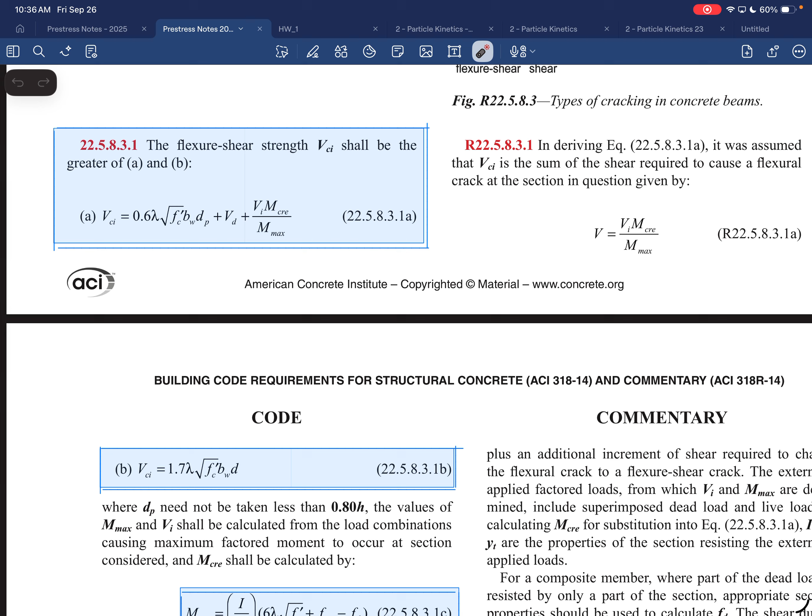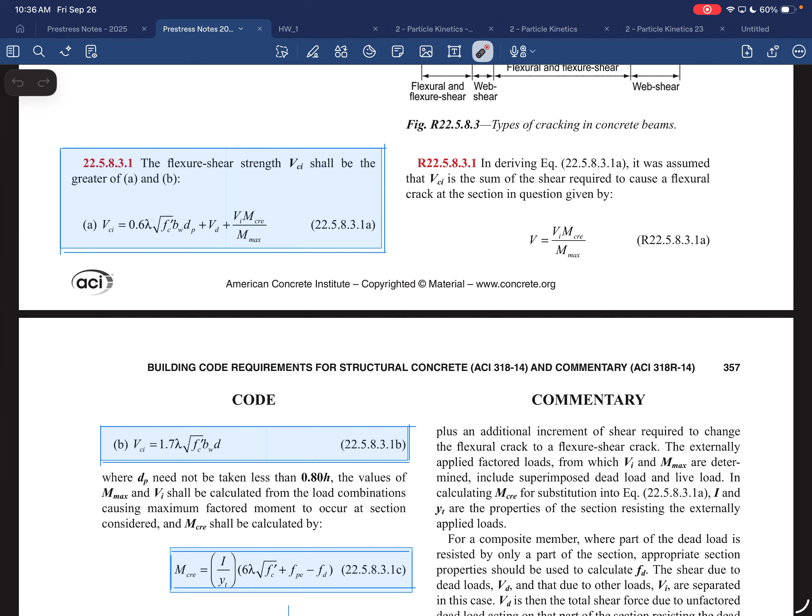It's really funny, is one of my sons. We would do lots of rock, paper, scissors, and my younger son almost always wins. And then he leaned over one time and he goes, 'Watch it, he always does paper at the beginning.' And then he figured it out, he always does paper at the beginning. And it's just... we even told him, and he still does it. It's because then you start playing, well, maybe he's gonna think that I'm gonna do paper, but I'm not gonna do paper, and then it's a mental game.

Tony's got you beat twice now, Will.

Okay, so here's VCI, right? And again, look at these terms in here. There's a lambda, we know what that is. BW, even that isn't going to be super clear because depends on in your homework it's a double T, and then with the web that's tapering, right? So even almost immediately, what do you do for the BW? VI, I don't even know what the hell that is.

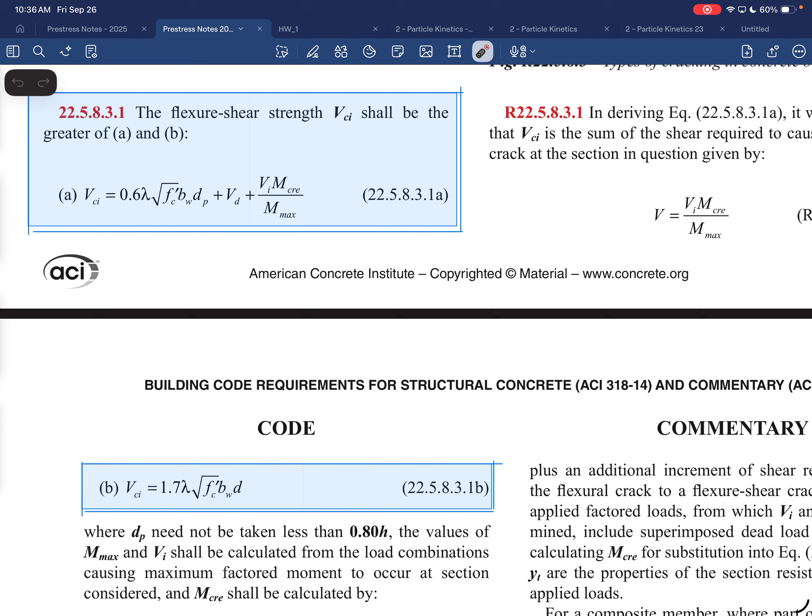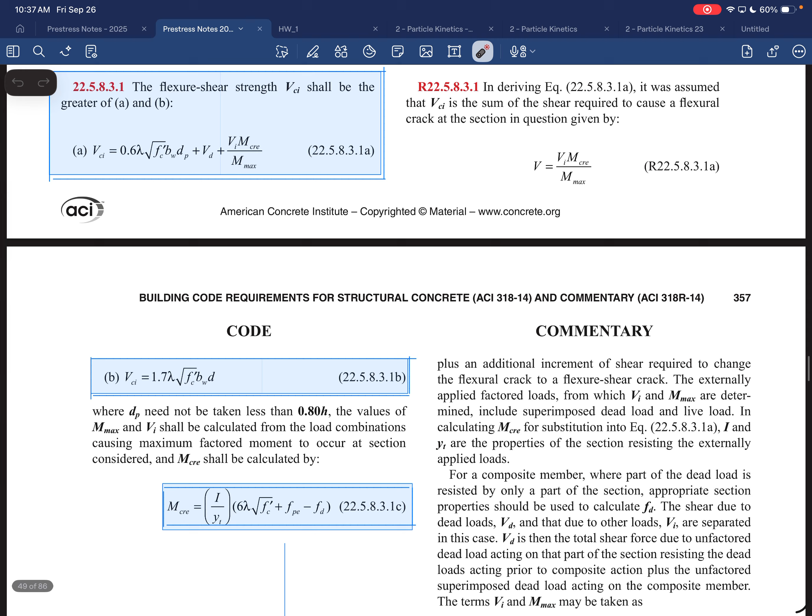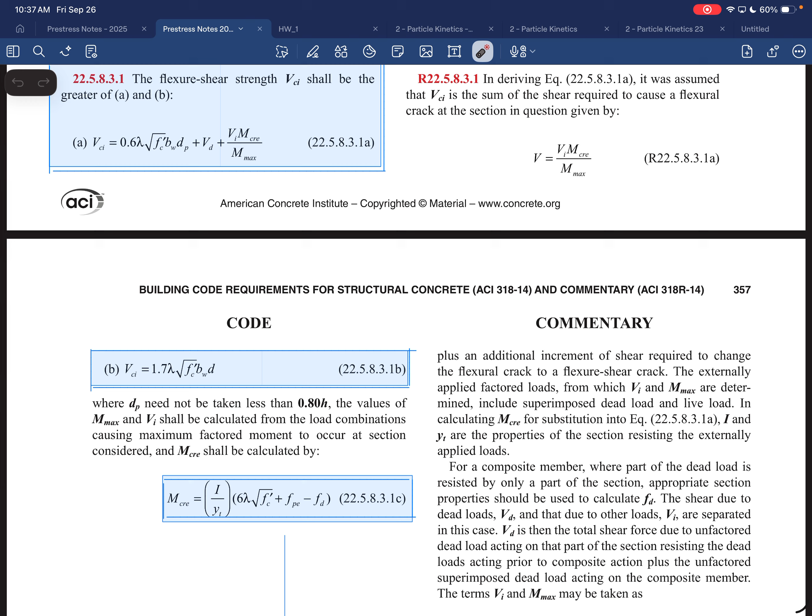Okay, MCRE is an equation. You look up the MCRE equation, there it is right there. Son of a bitch, right? And then, but then there's, again, some simplifications that you might be able to use as you go through here, right? So it's VCI is either this one or this one. So it's the flexure-shear shall be the greater of. So you grab the greater of this one or this one.

So just VCI, you have to put in a max on both of those things, okay? Then you keep going, right? And then this MCRE that shows up in that equation up there, that's what you use as the MCRE equation. Oh, there's a YT right here, right? We got to figure out what that YT is. We got a lambda, we got an FPE, I don't know what that is. An FD, I don't know what that is. That's what you'd be looking up in the nomenclature sections. It'll tell you what each one of those things are, and you have to go and read them and say, what the hell do those mean?

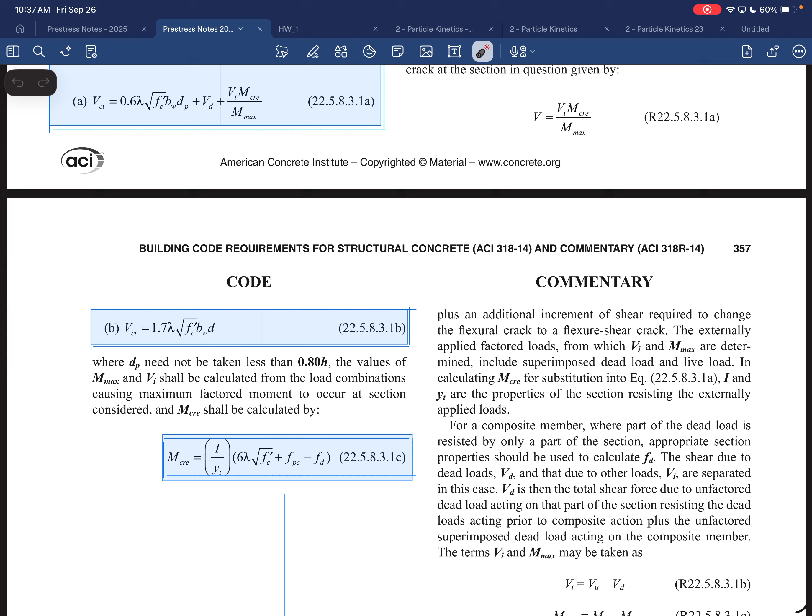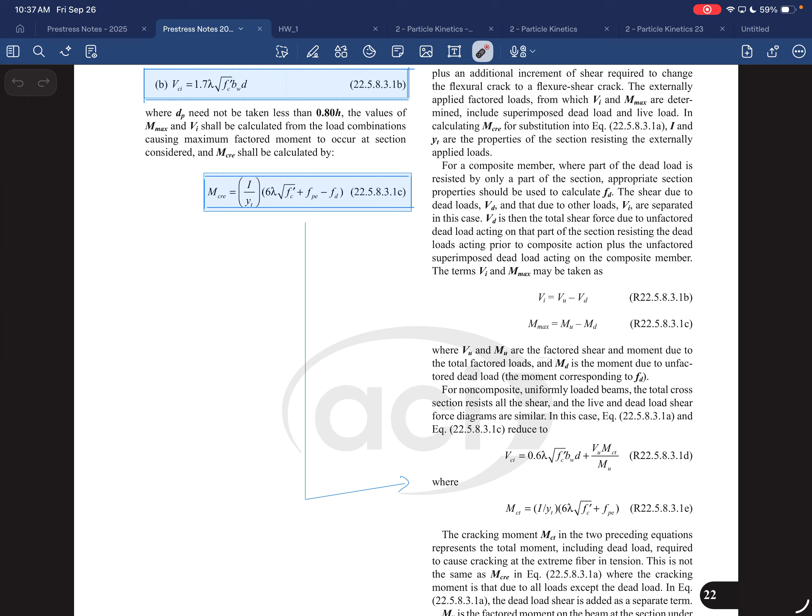That's kind of some of the stuff I'm going to go over today. Okay, and again, some simplifications that you may be able to use. I got this arrow here, you may be able to use that simplification. But you can read the stuff over on the right, and it'll tell you, if you can, use the simplification. I'm pretty sure you could use that one, but maybe just put an arrow to it with a question mark.

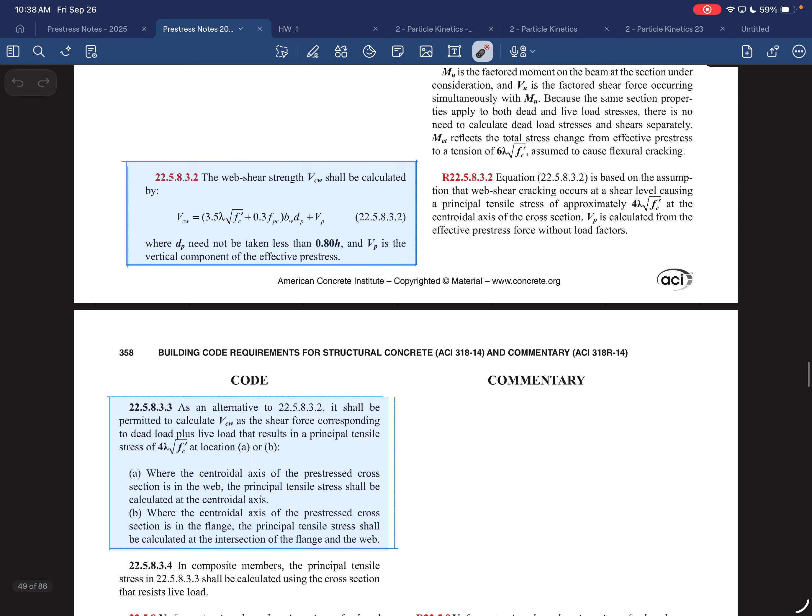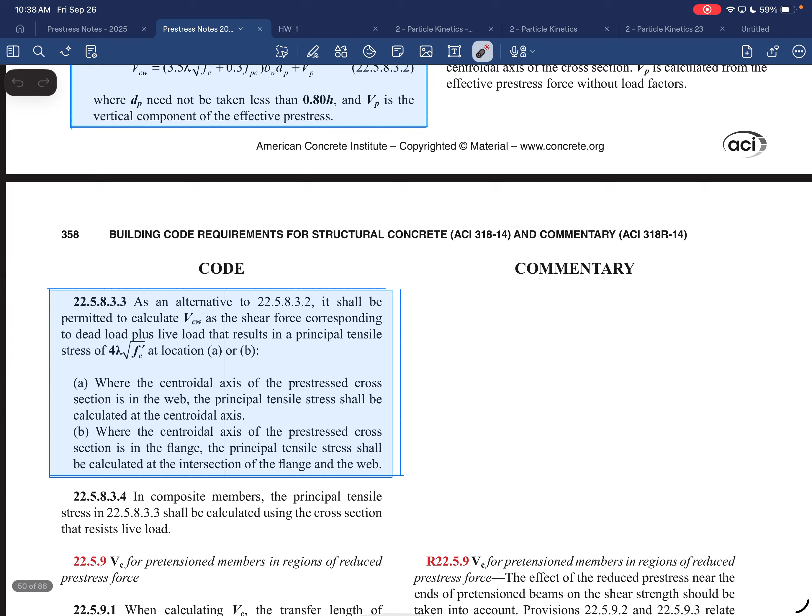This is from last time I taught it. Okay, VCW shall be calculated by this, right? Again, some other variables that are showing up in here, right? What is the VP value? And so it'll tell you all that stuff throughout. As an alternative to it, shall be permitted to calculate VCW as the shear force corresponding to the dead load plus the live load that results in principal stresses of this at locations A or B, right? So hopefully you start seeing this is a bookkeeping, logic, confusing as hell assignment, right? Like I said before, this is probably one of the worst you've seen, once you dive into it, you'll see.

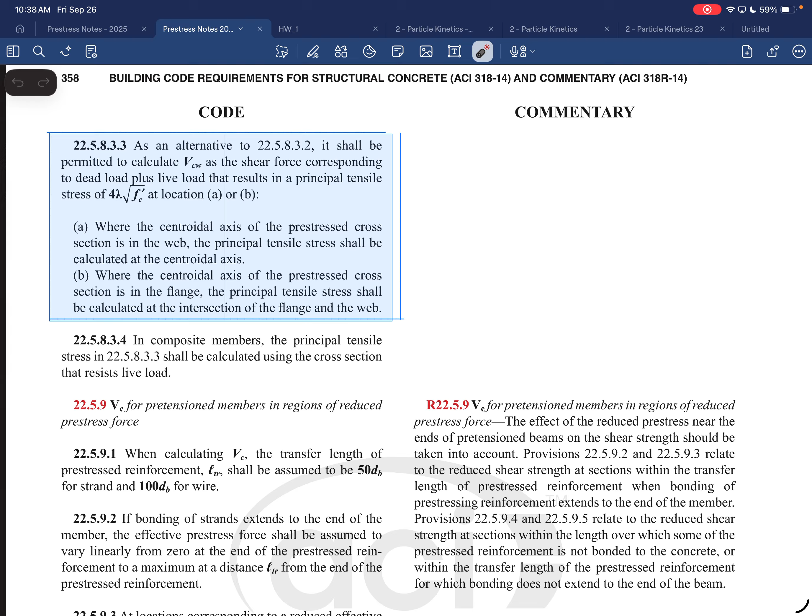Once you dive into it, this is probably one of the worst you've seen in concrete. Is there some bad ones in concrete that took concrete last year? Is it the whole class like that? Concrete 2 in particular, yeah. There's just so much. Yeah, and the code for the... yep. So those of you that have taken concrete 2, maybe this will be easy for you because you're used to using ACI values.

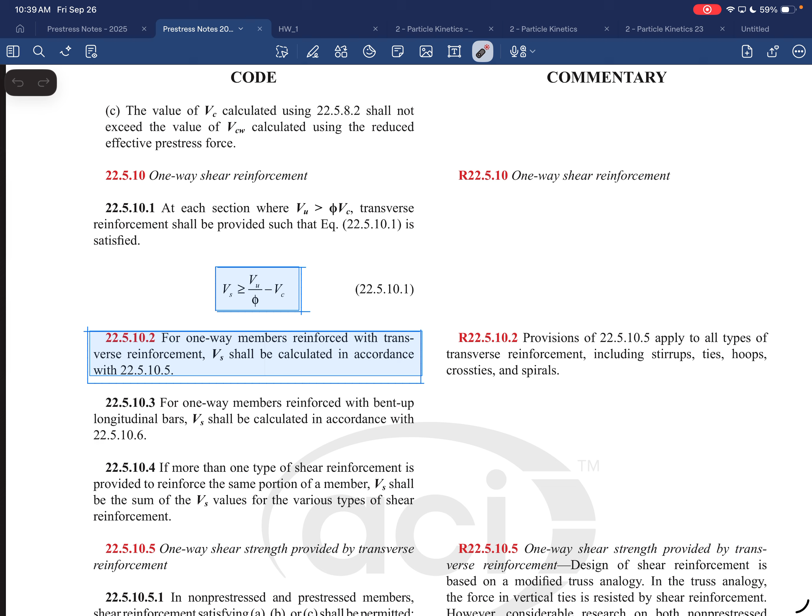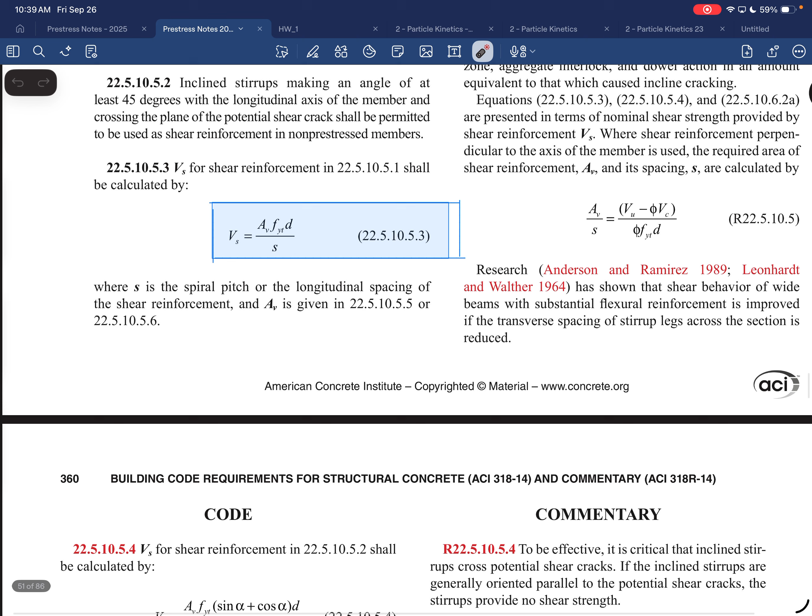Okay, VS that you get from the steel, right? You can calculate what the VS is. And then VS, you can calculate as this, right? AVFY D over S. I saw that they tied cages in the last time, in the big beam from 10 years ago, whatever it was. They tied a cage, and I wonder if it's because they failed the shear capacity, so then they had to put in stirrups, right? You're okay, you don't have to use shear stirrups in your beam design if you don't need them. If it works out for the calculations without the stirrups, great. But if it doesn't, you have to put in some stirrups, right?

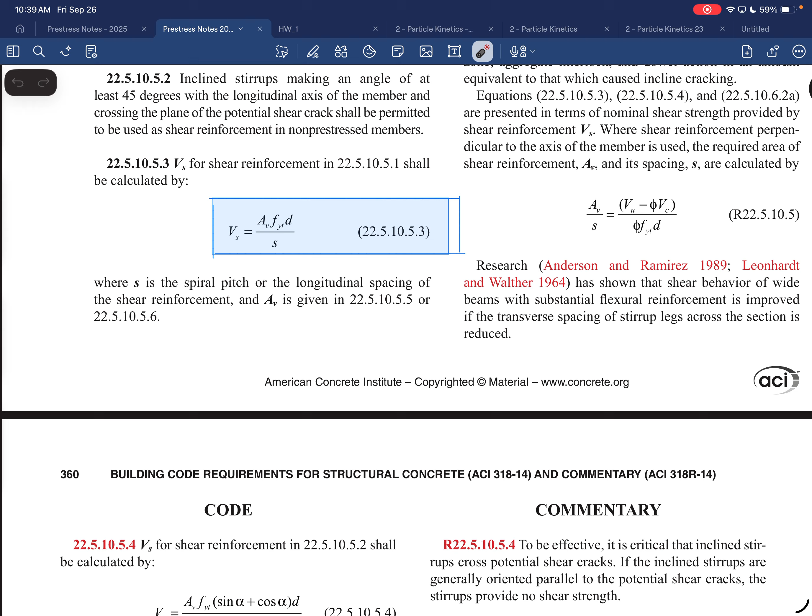And then the capacity that the stirrups add is simply AVFYd over S, same thing as you use for regular reinforced concrete. You could specify the spacing and stuff like that that's required.

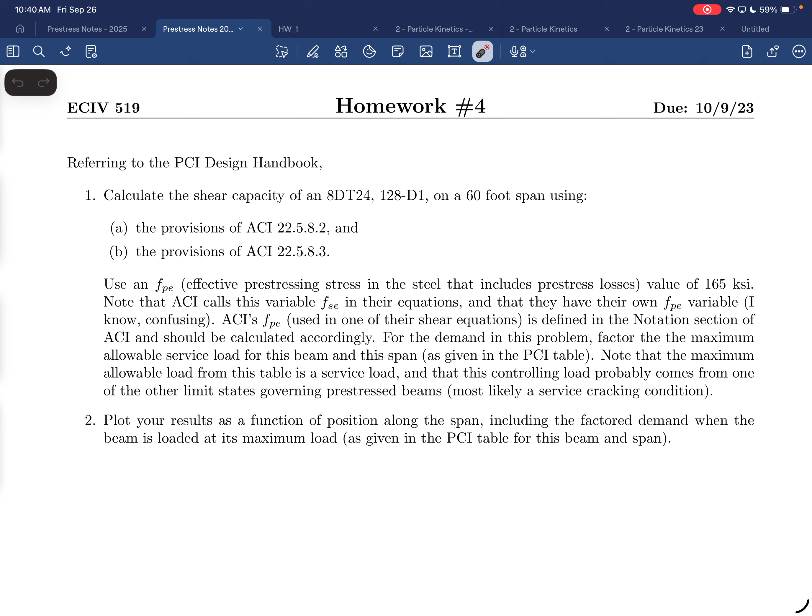So here's your homework. Calculate the shear capacity from an 8 double T 24 with 128 D1 tendons on a 60-foot span using the provisions of ACI 22.5.8.2 and 22.5.8.3. This is the approximate approach, do that, and then there's the approach where we do the VCI, VCW, and grab those differences. I tried to explain this, I used to think it was enough to explain, but it never was.

Use an FPE, effective pre-stressing stress in the steel that includes pre-stress losses of 165 KSI. You actually get that from the code, from the PCI. Note that ACI calls this variable FSE in their equations, so what we're calling FPE, they use FSE. They have their own FPE too, which makes it even more confusing. We have an FPE from our formulation of stuff, and they have their own FPE, so you have to be careful with that.

For the demand in this problem, factor the maximum allowable service load from this beam and the span. So you're going to have to look at the PCI tables, their load tables for different spans, and look up what the allowable load is that you can put on top of this thing.

I think some of it's applied dead load and some of it's applied live load. It tells you in the text what that load means, and then you'll have to add on the self weight of it as well. Both of those things in, and then that'll be the demand.

And the reason you're going to plot your demand on there is just to see if your capacity is greater than your demand, that's what you're making sure. So you're going to have a line on that. I'll show you what the solution looks like.

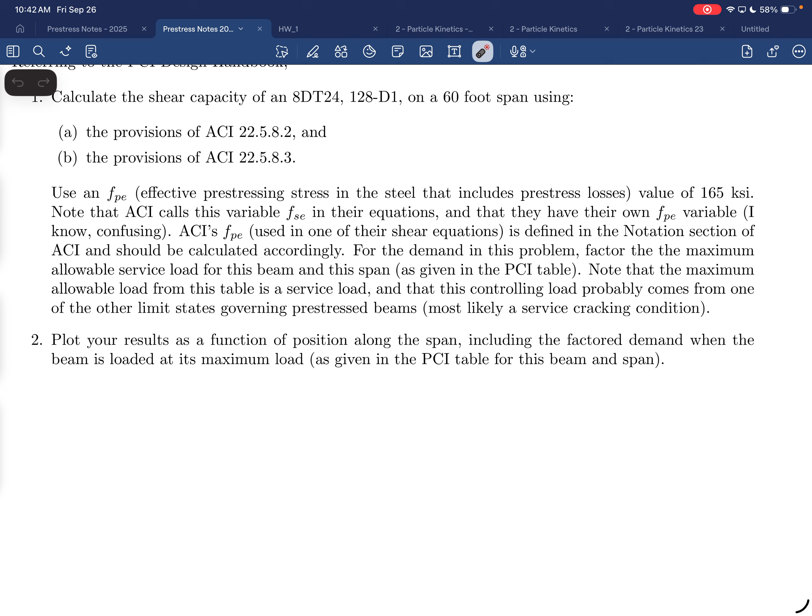Note that the maximum allowable load for this table is service load, and that the controlling load probably comes from another limit state governing the pre-stress beam, so most likely cracking. Plot your results as a function of position along the span, including the factored demand when the beam is loaded at the maximum load.

So then this is what the answer is, and then you have it there. This would be very similar to what you did in the last homework where I gave you the solution. You just keep going until you get this, right? This is what it should be.

The black line here is the more complicated method, the VCI VCW method, and this one here is the approximate method. Like I said, the more advanced method, the harder to implement, ends up being less conservative. It says you can go to a capacity of 70 kips as opposed to like 48 kips or whatever that is.

Note this little uptick over here. They both kind of, this lower one, I think this is the 2 square root F prime C, is what these values are down here. But it increases a little bit at the tail end.

And what that is, is that D limit. Remember the D, it says the D need not be less than 0.8 H. That's what this is. So basically everywhere along here, the D is less than 0.8 H, except for right here, it starts getting bigger than 0.8 H, and then you could use the bigger D value for that. That's why it starts increasing, because this is a harped section, right? It comes down, the EP comes down like in a heart. So near the middle, you're going to have bigger depths down to your steel, and that's why it starts increasing. Everywhere else, it's the 0.8 H control.

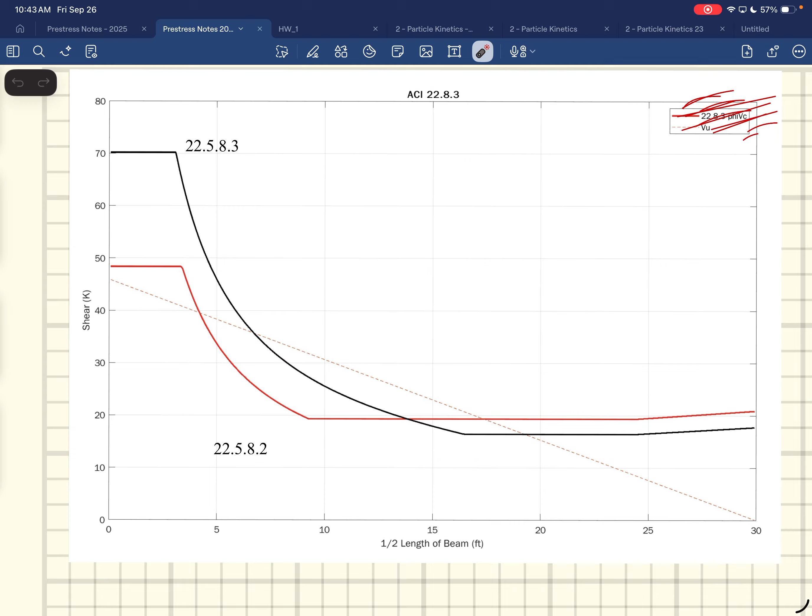So then that'll be one of the columns, right? I would even have a column for D that you use, and it's just going to be what the actual D is, limited at 0.8 H, so you'll have a D effective that you use throughout. That's what you're aiming for. Okay, so some variables, their FPE, right, this comes right out of the notation section.

Their FPE in ACI says compressive stress in concrete due only to the effective pre-stress force, after allowance for all pre-stress losses, at extreme fiber of section, if tensile stress is caused by external applied loads, in PSI.

What's going on? The other thing to be very careful about, I just want to state this, if it's not written on there, write it as so. All variables in ACI go in as positive numbers. If we're talking about a compression stress we're going to get, your methodology is going to produce a negative number, but when you put it into ACI, it goes in as a positive number.

Right? So compressive stress in concrete due only to the effective pre-stress forces, after allowance for all pre-stress losses, at extreme fiber of section, if tensile stress is caused by externally applied load. So basically this part right here is saying at the extreme fiber where the externally applied load causes tension.

So this would be at the bottom. They're just saying at the bottom. Under a simply supported beam, loaded due to gravity, the applied load is going to cause tension at the bottom. That's what the second part of the sentence is saying. So it's asking, what is the stress down at the bottom?

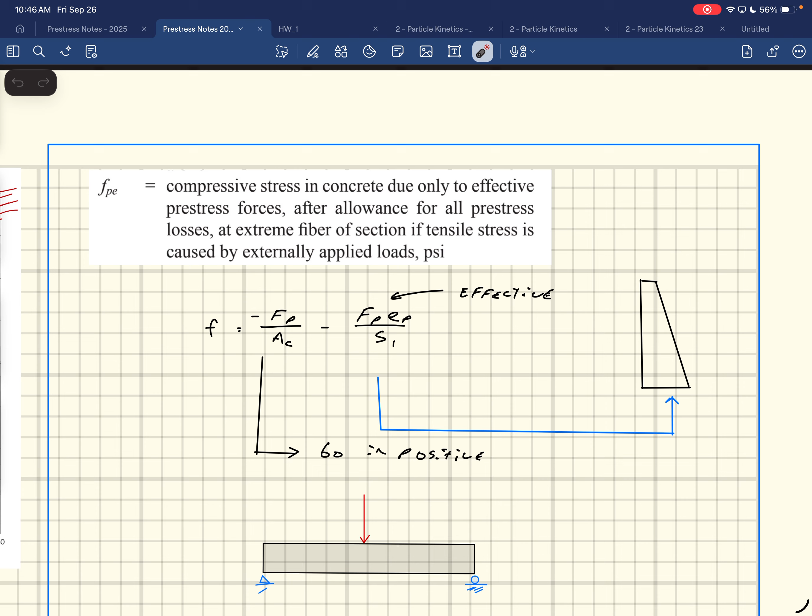And then, I do say go in positive. It goes in positive, even though you're going to calculate it, because your S1 here, if you're going to the bottom, is going to be positive, and then it works out. The value you'll get is a negative number though, so just make sure that goes in as a positive. Applied load from the top gives you tension down at the bottom.

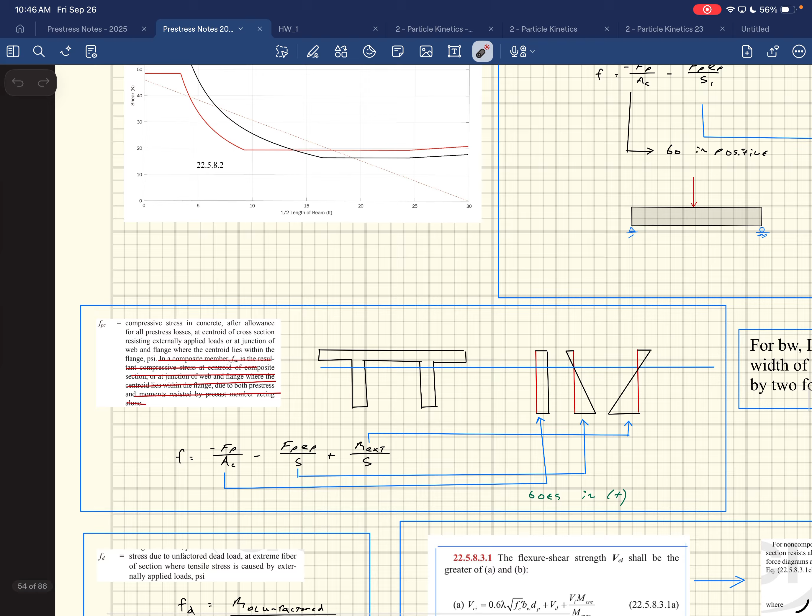Okay, that's their FPE value, different than our FPE value, right? FPC: compressive stress in concrete after allowance for all pre-stress losses, so use the effective pre-stressing force, at centroid of cross-section resisting externally applied loads, or at the junction of the web and the flange where the centroid lies within the flange. In composite members - we don't have composite members.

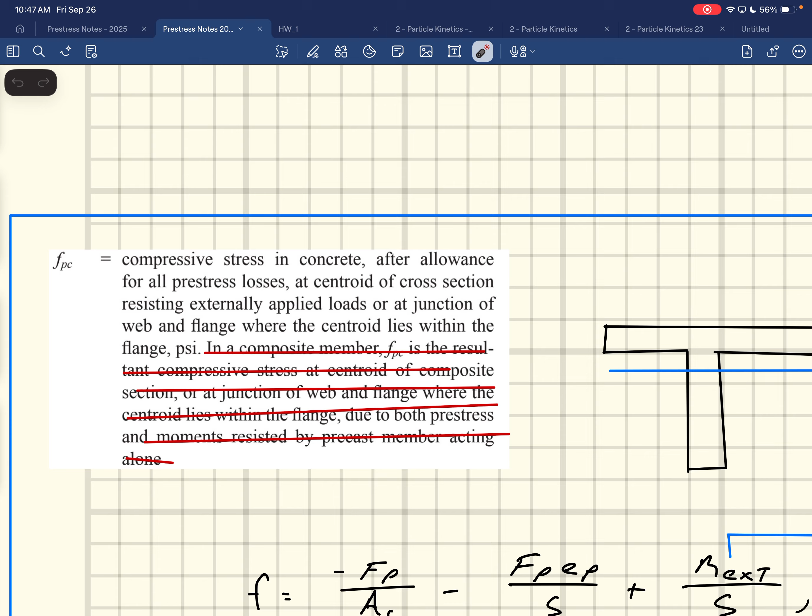So what this one is saying: compressive stress in the concrete after allowance for all pre-stress losses, so just use the FPE, at centroid of cross-section resisting externally applied loads, or at the junction of this thing. Okay, so this is where, so it's a double T that you have going on, okay?

This is what my stress calculations are: negative Fp over Ac minus FPEP over S plus M external over S. The Fp over Ac gives us a distribution that looks like this - this one and this one. This is bending about the centroid. This is the stress coming from my pre-stressing, and this is the stress coming from applied loads.

But if we look over here, if we break them down into these things, FPC is asking for the stress at the centroid - that's what this thing at the centroid over here means. So it's asking for the stress here: what stress is our beam going to see at that location? Just this, right? It's just Fp over Ac for ours.

Because these things are bending about the neutral axis, or the centroid rather - they're bending about the centroid, so there's going to be zero coming from these things. So this, I mean, you could calculate if you wanted to, but this value is going to be 0, and this value is going to be 0.

That makes sense, everybody? So it's really just saying this. So why all the other words? Right? Why didn't they just say it's Fp over Ac?

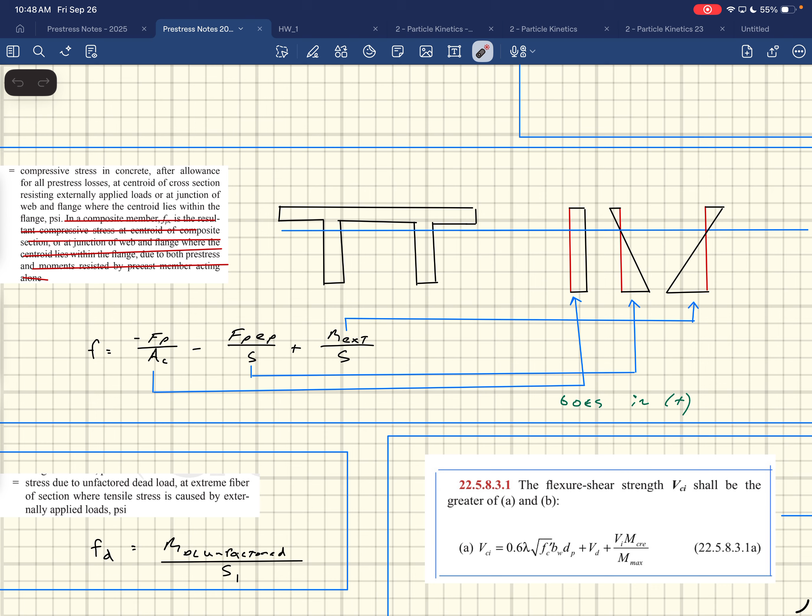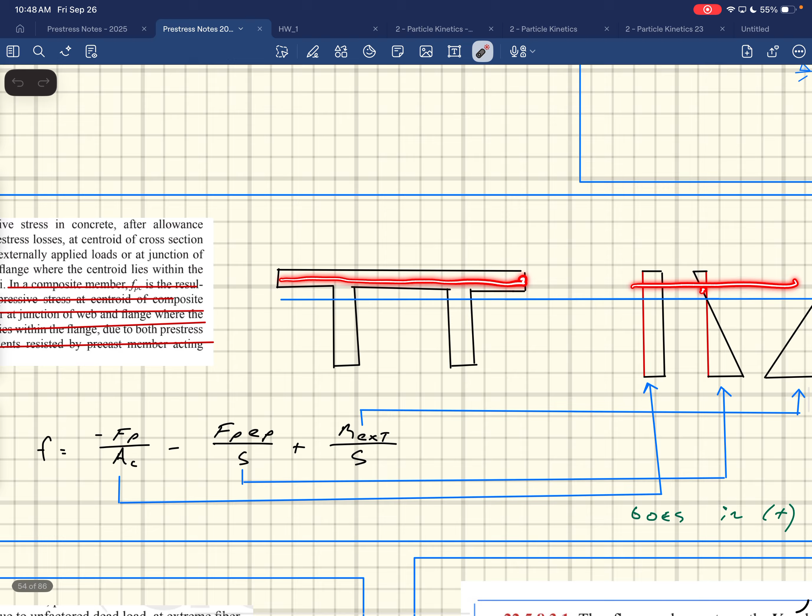Well, it's for some reason - if this centroid ends up in here, right, then you would actually have these values over here too. If my centroid was up here, these two values would actually be something. And they say to use it, that you're supposed to find it right at the joint between those two things. So the value's up here, but we're grabbing it at the joint.

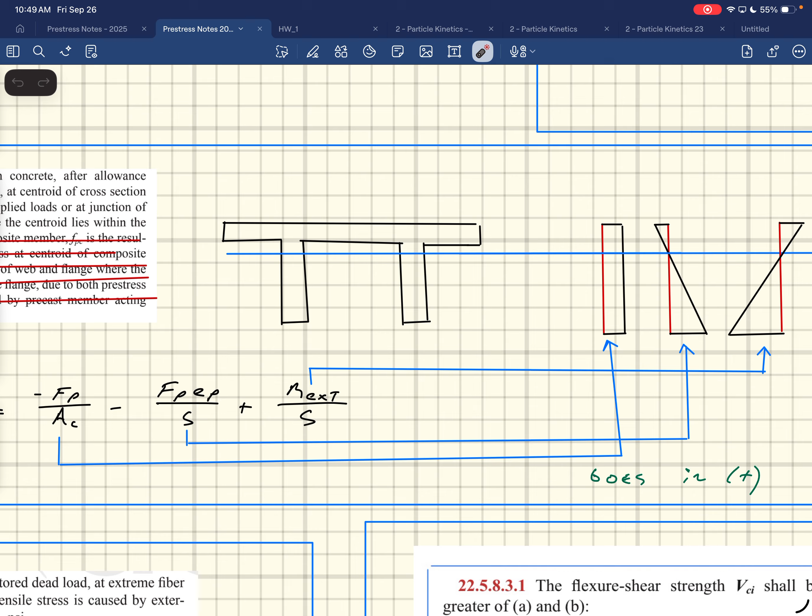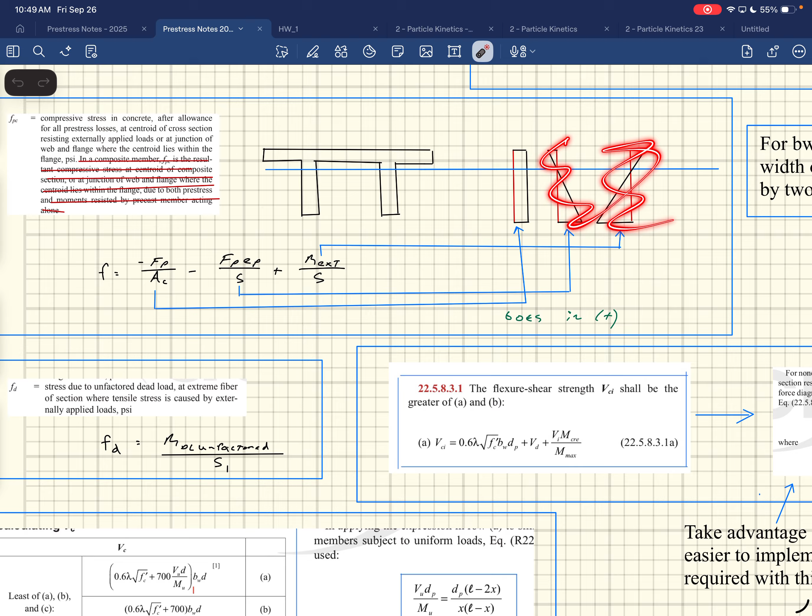You'd have to grab it at the joint right there - that's the problem, that's why there's the extra words there. But for us, it's just going to be Fp over Ac, and again, it goes in positive. Even though we're going to get a negative value according to our equations, that goes in as positive, and that'll be constant along the whole length, because all the other bending is going to happen about the centroid. It's not going to affect it. So that's just going to be the same value all the way.

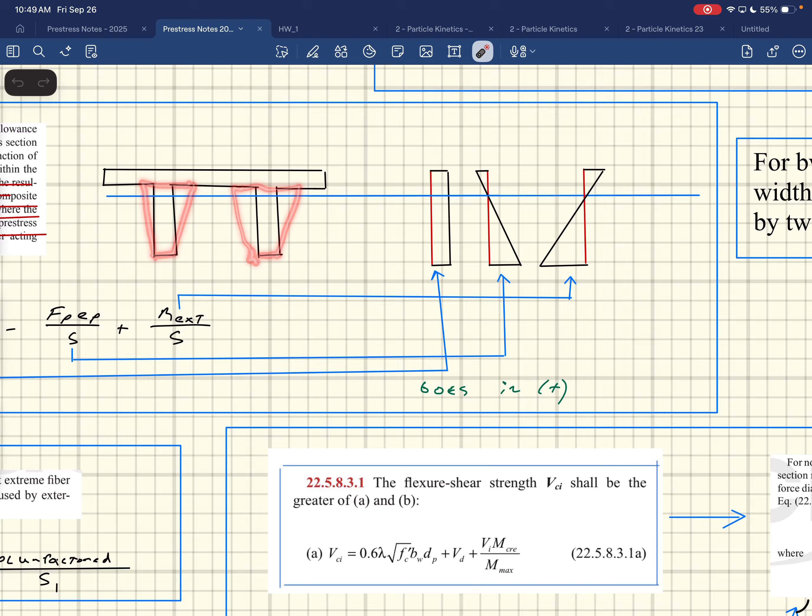BW, right? One of the equations talks about BW. These things aren't actually shaped like this - if you look them up, they go like this. Well, that's exaggerated, but they're wider at the top and narrower down at the bottom. So what I would do is calculate BW average, the average width of one web, and then multiply that by 2.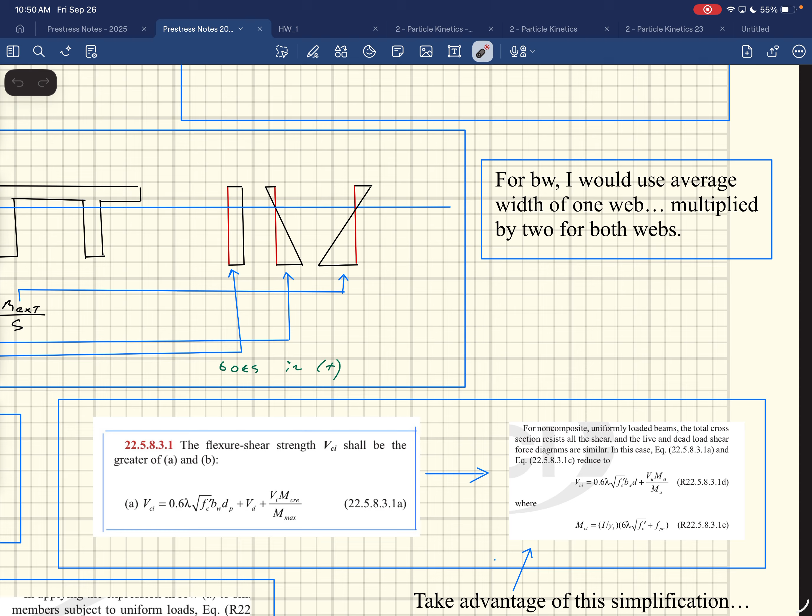Because you have 2 webs carrying the load. The other way to do it is cut your shear load in half - you can cut your demand in half and compare it to one of them, but I would just double my shear load because we have 2 webs. That's the better way to do it. Does that make sense? That's what I would do, because it's looking for that BW, but really my width of my web varies over the height, so just using the average works out well.

Another value: stress due to unfactored dead load at extreme fiber of section where tensile stress is caused by externally applied load. So same thing - stress due to unfactored dead load at extreme fiber where the tensile stress is caused by externally applied load. That'd be my moment due to my dead load unfactored load divided by S1 in our case.

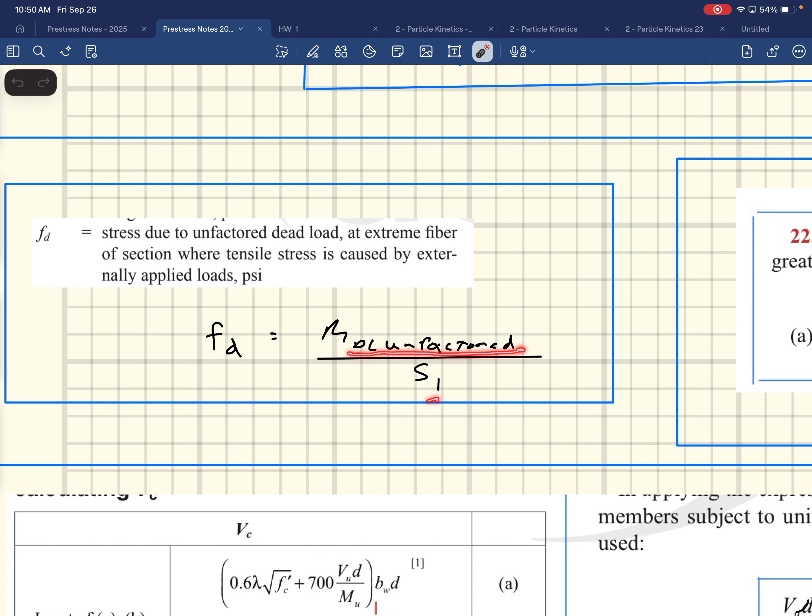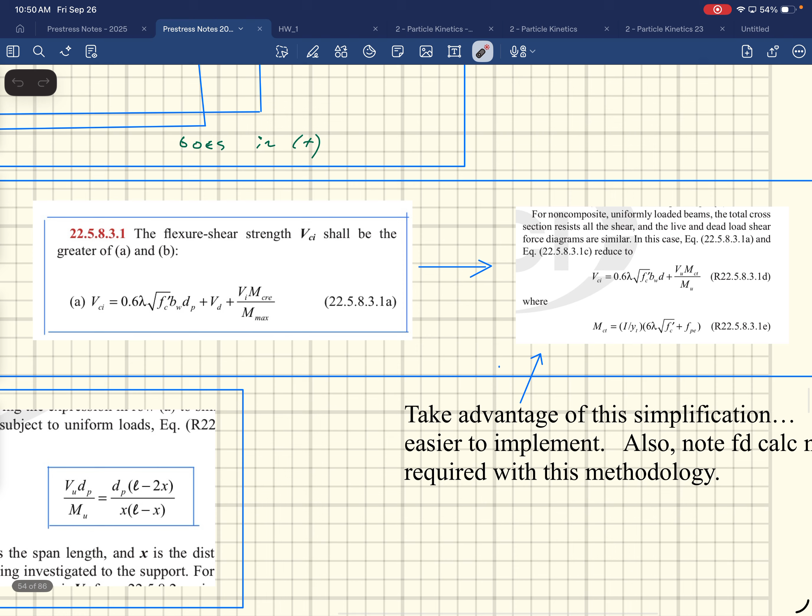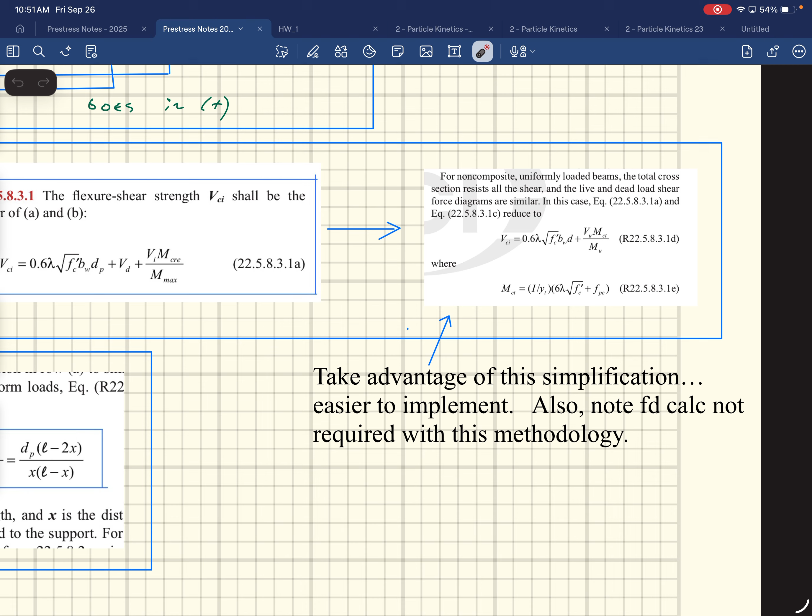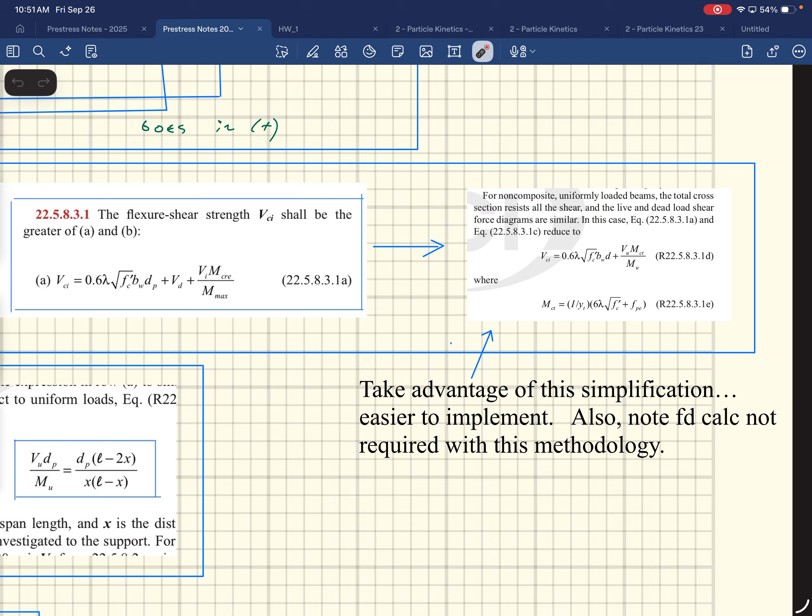So use these, take advantage of these simplifications if you can. It says take advantage of the simplification. Usually the FD calc isn't required in this methodology - you don't have to do the FD calc. We're out of time, but I'm going to keep going here anyway. You take advantage of this simplification if you can, because these are things that always come up.

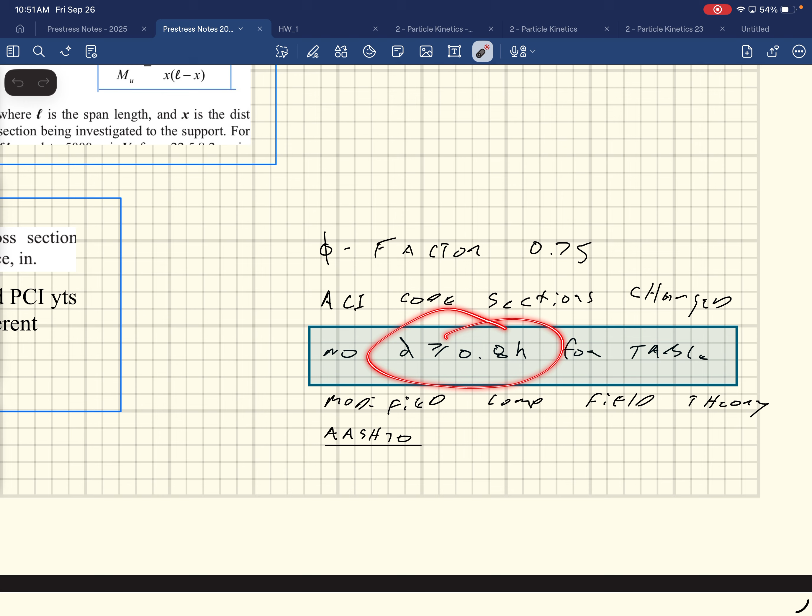Phi factor 0.75 - I haven't said that in notes yet. The phi factor for shear is the same as the phi factor for regular reinforced concrete, which is 0.75. So that has to be there. If you're using your own ACI code, be careful - the section numbers have changed. The methodology stays the same, but that has changed. One of the things is, don't worry about this one right now. For one of the tables, that d greater than or equal to 0.8h is eliminated for one of the methodologies. No, that's something else. And then here's the last thing.

The distance from the centroid axis of the cross section - so this is what ACI says. ACI says YT in their equations is the distance from the centroid axis of gross section, neglecting reinforcement, to the tension face. So the T in their case refers to the tension face. This comes from the PCI design manual - their T talks about going to the top of the section, and B is going to the bottom of the section. So ACI's YT is PCI's YB. Great, right? Is what it is.

This is just from years of me assigning this and working with the students. It's always one of these things that's a problem, so I figured if I hit it from the beginning, maybe it'll save us as we go along. So the YB and the YT, be careful of those - they're talking Y bottom versus Y top. ACI is talking about Y tension, which is what their T stands for.

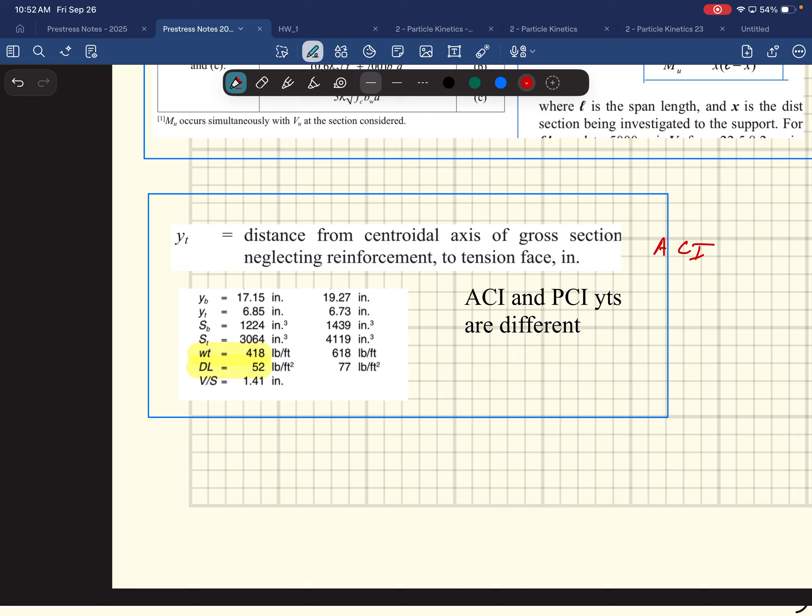Cool, give it a go. It takes a while, so get on it. Get on it, leave it for the due date. What's that? Leave it for the day too. Yeah, that's right, yeah, that's what you always do. That's what I did this week.

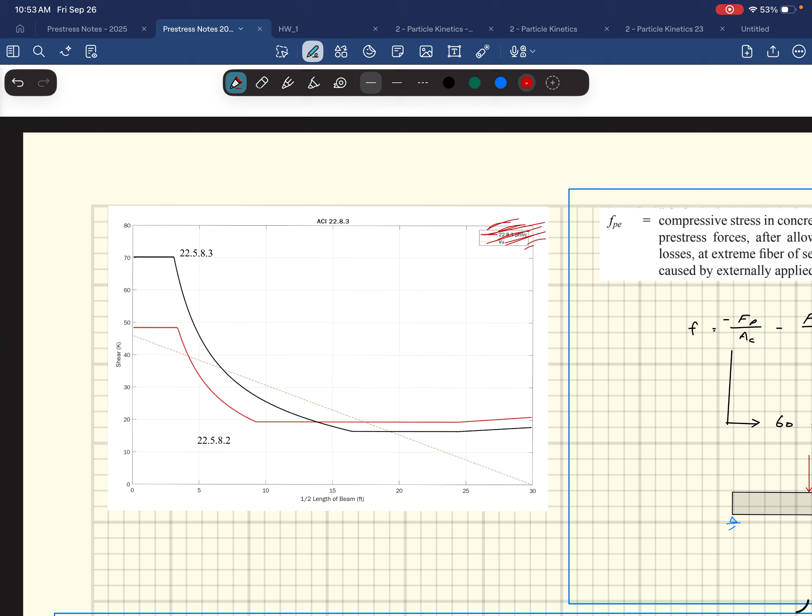Are you working on it right now? Good, I tried to do it yesterday. I have no idea what's going on.